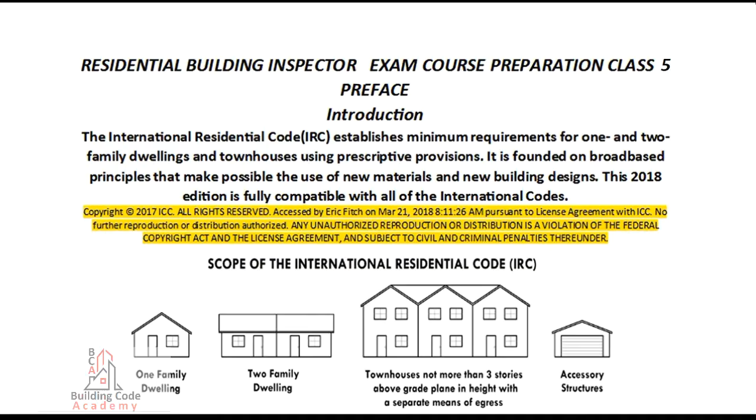R703.1 General. Exterior walls shall provide the building with a weather-resistant exterior wall envelope. The exterior wall envelope shall include flashing as described in section R703.4.

R703.2 Water-resistive barrier. One layer of number 15 asphalt felt, free from holes and breaks, complying with ASTM D226 for Type 1 felt, or other approved water-resistive barrier shall be applied over studs or sheathing of all exterior walls. Number 15 asphalt felt shall be applied horizontally, with the upper layer lapped over the lower layer not less than 2 inches (51 millimeters). Where joints occur, felt shall be lapped not less than 6 inches (152 millimeters). Other approved materials shall be installed in accordance with the water-resistive barrier manufacturer's installation instructions.

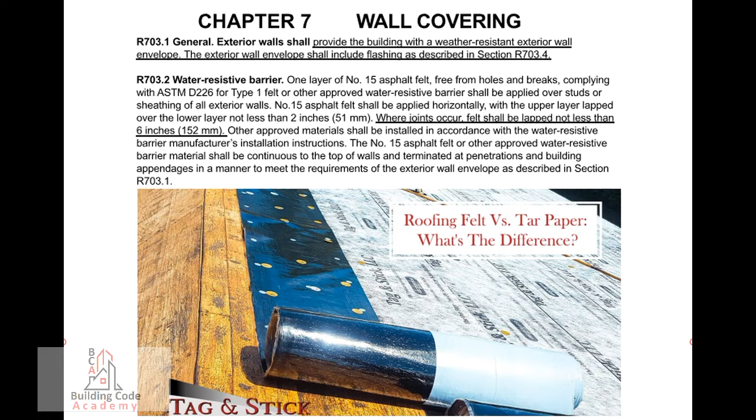The number 15 asphalt felt or other approved water-resistive barrier material shall be continuous to the top walls and terminated at penetrations and building appendages in a manner to meet the requirements of the exterior wall envelope as described in section R703.1.

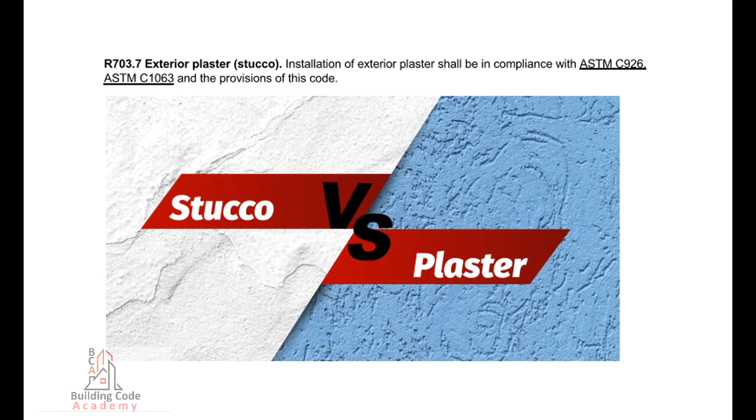R703.7 Exterior plaster, stucco. Installation of exterior plaster shall be in compliance with ASTM C926, ASTM C1063, and the provisions of this code.

R703.7.1 Lath. Lath and lath attachments shall be of corrosion-resistant materials. Expanded metal or woven wire lath shall be attached with 1.5 inch long (38 mm), 11 gauge nails having a 7/16 inch (11.1 mm) head, or 7/8 inch long (22.2 mm), 16 gauge staples, spaced not more than 6 inches (152 millimeters), or as otherwise approved.

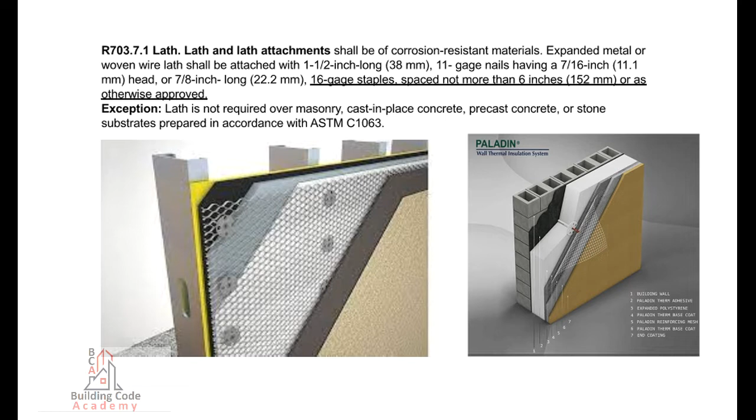Exception: Lath is not required over masonry, cast-in-place concrete, precast concrete, or stone substrates in accordance with ASTM C1063.

R703.9.1 Exterior Insulation and Finish Systems (EIFS). EIFS shall comply with the following: 1. ASTM E2568. 2. EIFS shall be limited to applications over substrates of concrete or masonry wall assemblies. 3. Flashing of EIFS shall be provided in accordance with the requirements of section R703.4. 4. EIFS shall be installed in accordance with the manufacturer's instructions.

5. EIFS shall terminate not less than 6 inches (152 millimeters) above the finished ground level. 6. Decorative trim shall not be face nailed through EIFS.

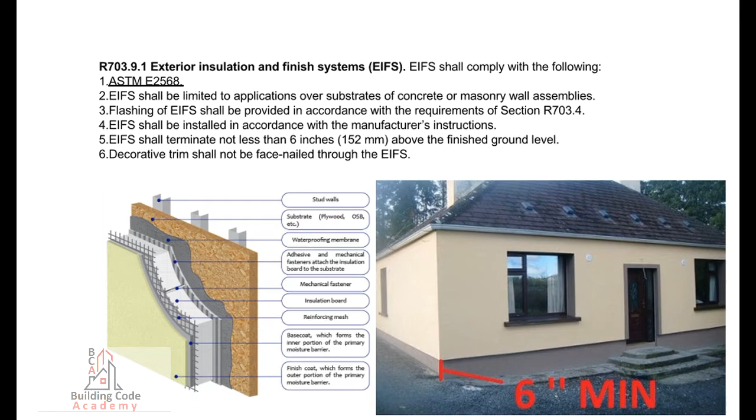R702.3.5.1 Screw fastening. Screws for attaching gypsum board and gypsum panel products to wood framing shall be type W or type S in accordance with ASTM C1002 and shall penetrate the wood not less than 5/8 inch (15.9 millimeters).

Gypsum board and gypsum panel products shall be attached to cold-formed steel framing with minimum number 6 screws. Screws for attaching gypsum board and gypsum panel products to cold-formed steel framing less than 0.033 inch (1 millimeter) thick shall be type S in accordance with ASTM C1002 or bugle head style in accordance with ASTM C1513, and shall penetrate the steel not less than 3/8 inch (9.5 millimeters).

Screws for attaching gypsum board and gypsum panel products to cold-formed steel framing 0.033 inch to 0.112 inch (1 millimeter to 3 millimeters) thick shall be in accordance with ASTM C954 or bugle head style in accordance with ASTM C1513.

Screws for attaching gypsum board and gypsum panel products to structural insulated panels shall penetrate the wood structural panel facing not less than 7/16 inch (11.1 millimeters).

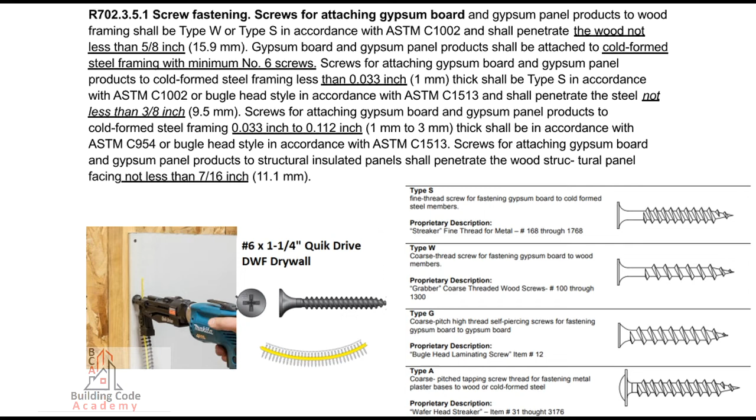Chapter 8, Roof Ceiling Construction. Wood Roof Framing.

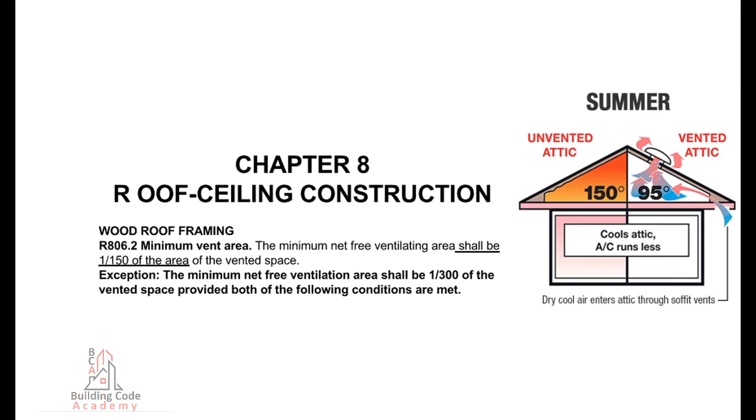R806.2 Minimum Vent Area. The minimum net-free ventilating area shall be 1/150th of the area of the vented space. Exception: the minimum net-free ventilation area shall be 1/300th of the vented space provided both of the following conditions are met.

R802.3 Ridge. A ridge board used to connect opposing rafters shall be not less than 1 inch (25 millimeters) nominal thickness, and not less in depth than the cut end of the rafter. Where ceiling joist or rafter ties do not provide continuous ties across the structure, a ridge beam shall be provided and supported on each end by a wall or girder.

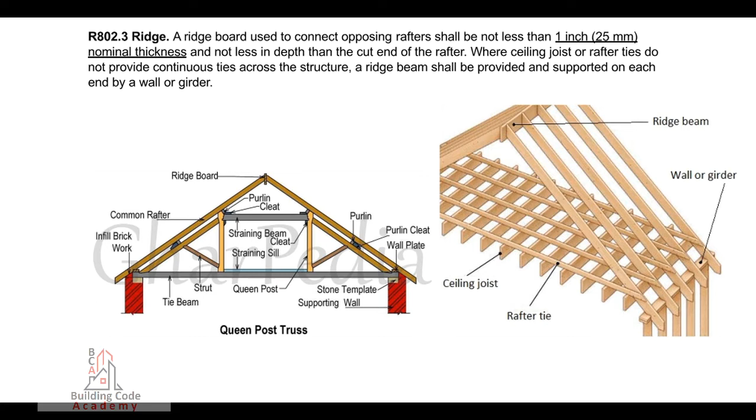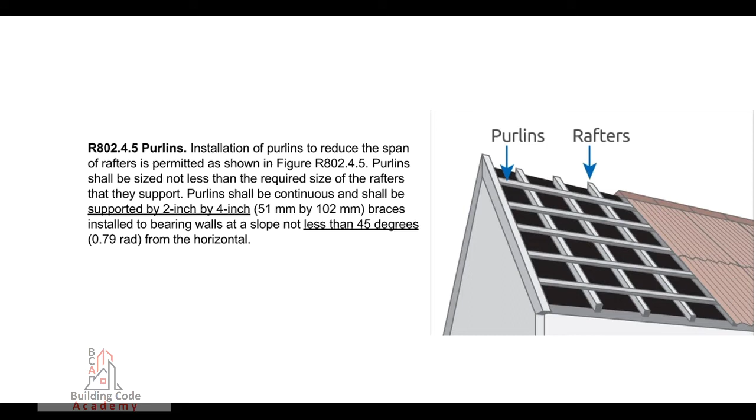R802.4.5 Purlins. Installation of purlins to reduce the span of rafters is permitted as shown in Figure R802.4.5. Purlins shall be sized not less than the required size of the rafters that they support. Purlins shall be continuous and shall be supported by 2 inch by 4 inch (51 mm by 102 mm) braces installed into bearing walls at a slope not less than 45 degrees (0.79 radians) from the horizontal.

R802.5.2.1 Ceiling Joists Lapped. Ends of ceiling joists shall be lapped not less than 3 inches (76 millimeters), or butted over bearing partitions or beams and toe-nailed to the bearing member. Where ceiling joists are used to provide resistance to rafter thrust, lapped joists shall be nailed together in accordance with Table R802.5.2, and butted joists shall be tied together in a manner to resist such thrust.

Joists that do not resist thrust shall be permitted to be nailed in accordance with Table R602.3.1. Wood structural panel roof sheathing in accordance with Table...

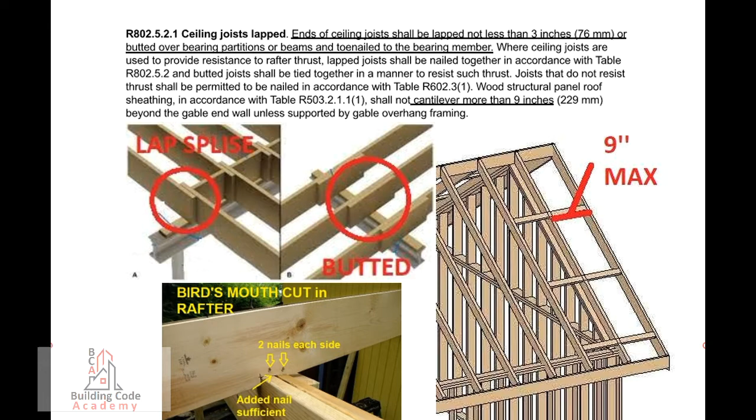R503.2.1.1(1) shall not cantilever more than 9 inches (229 millimeters) beyond the gable end wall, unless supported by gable overhang framing.

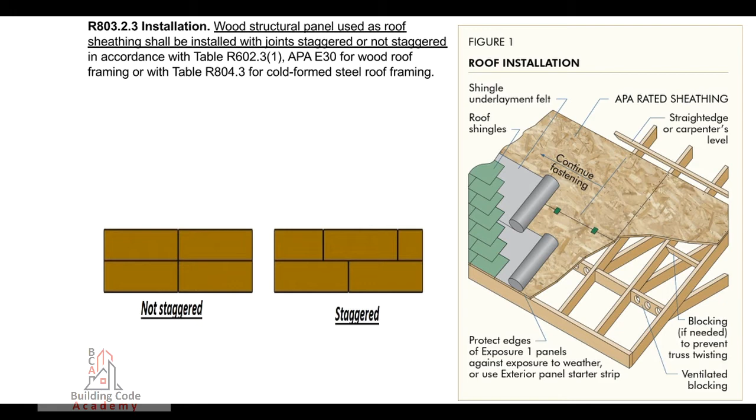R803.2.3 Installation. Wood structural panel used as roof sheathing shall be installed with joints staggered or not staggered in accordance with Table R602.3.1, APA E30 for wood roof framing, or with Table R804.3 for cold-formed steel roof framing.

807.1 Attic Access. Buildings with combustible ceiling or roof construction shall have an attic access opening to attic areas that have a vertical height of 30 inches (762 millimeters) or greater over an area of not less than 30 square feet (2.8 meters squared). The vertical height shall be measured from the top of the ceiling framing members to the underside of the roof framing members.

The rough framed opening shall be not less than 22 inches by 30 inches (559 millimeters by 762 millimeters), and shall be located in a hallway or other location with ready access. Where located in a wall, the opening shall be not less than 22 inches wide by 30 inches high (559 millimeters wide by 762 millimeters high).

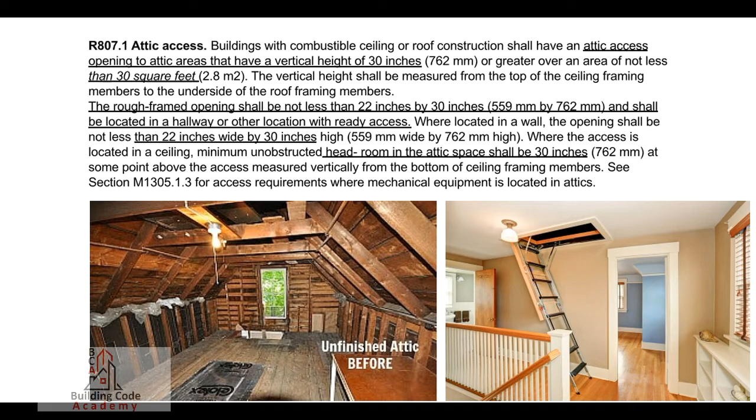Where the access is located in a ceiling, minimum unobstructed headroom in the attic space shall be 30 inches (762 millimeters), at some point above the access measured vertically from the bottom of the ceiling framing members. See Section M1305.1.3 for access requirements where mechanical equipment is located in attics.

Chapter 9. Roof Assemblies.

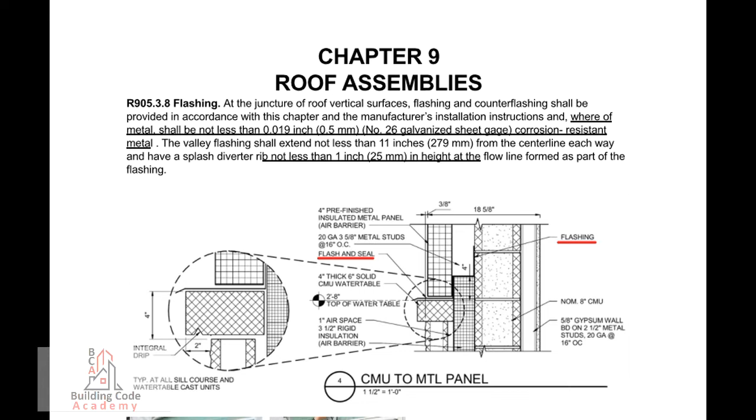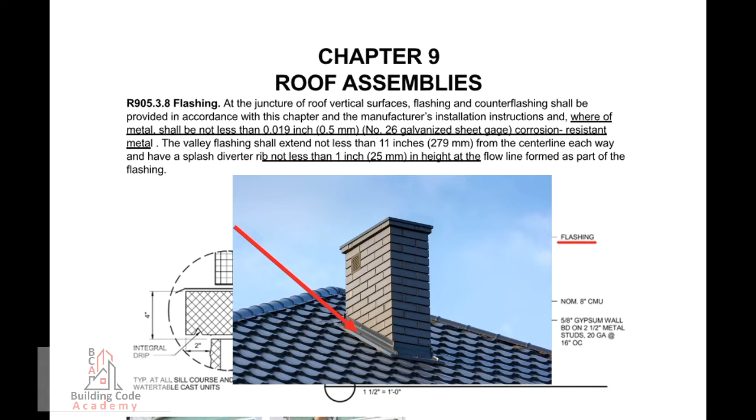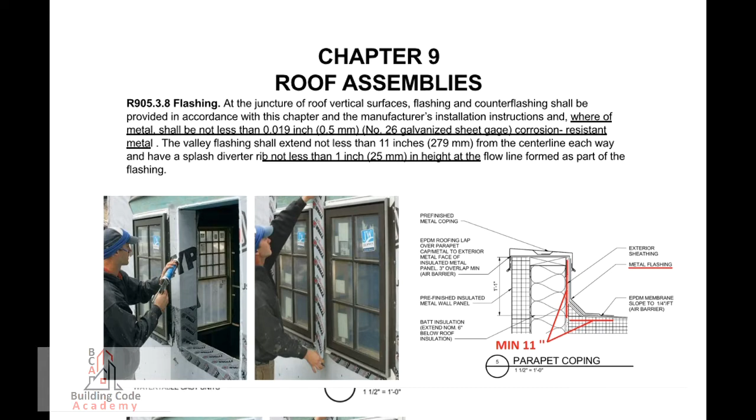R905.3.8 Flashing. At the juncture of roof vertical surfaces, flashing and counterflashing shall be provided in accordance with this chapter and the manufacturer's installation instructions, and where of metal shall be not less than 0.019 inch (0.5 millimeters), number 26 galvanized sheet gauge, corrosion-resistant metal. The valley flashing shall extend not less than 11 inches (279 millimeters) from the center line each way, and have a splash diverter rib not less than 1 inch (25 millimeters) in height, at the flow line formed as part of the flashing.

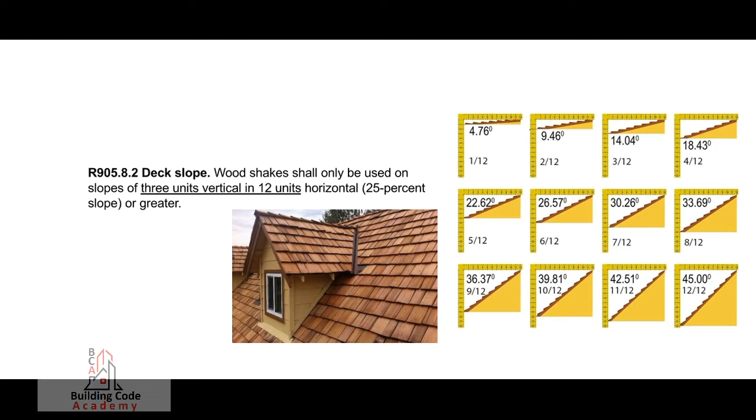R905.8.2 Deck slope. Wood shakes shall only be used on slopes of 3 units vertical in 12 units horizontal, 25% slope or greater.

R902.1 Roofing covering materials. Roofs shall be covered with materials as set forth in sections R904 and R905. Class A, B, or C roofing shall be installed in jurisdictions designated by law as requiring their use, or where the edge of the roof is less than 3 feet (914 millimeters) from a lot line. Class A, B, and C roofing required by this section to be listed shall be tested in accordance with UL 790 or ASTM E108.

Exceptions. 1. Class A roof assemblies include those with coverings of brick, masonry, and exposed concrete roof deck. 2. Class A roof assemblies include ferrous or copper shingles or sheets, metal sheets and shingles, clay or concrete roof tile, or slate installed on non-combustible decks. 3. Class A roof assemblies include minimum 16 ounces per square foot of copper sheets installed over combustible decks. 4. Class A roof assemblies include slate installed over underlayment over combustible decks.

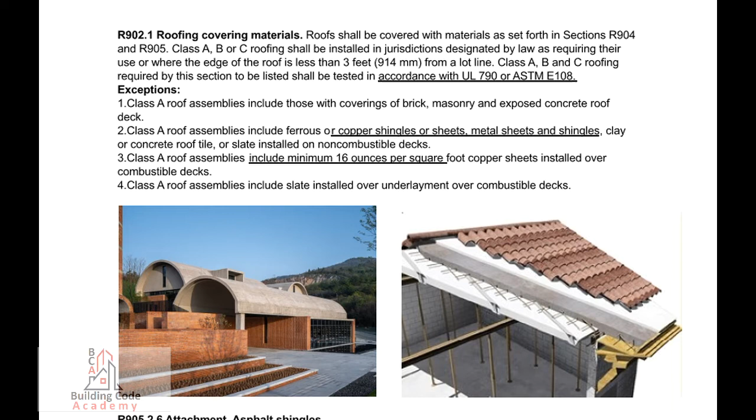R905.2.6 Attachment. Asphalt shingles shall have the minimum number of fasteners required by the manufacturer's approved installation instructions, but not less than 4 fasteners per strip shingle or 2 fasteners per individual shingles. Where the roof slope exceeds 21 units vertical and 12 units horizontal (175% slope), shingles shall be installed in accordance with the manufacturer's approved installation instructions.

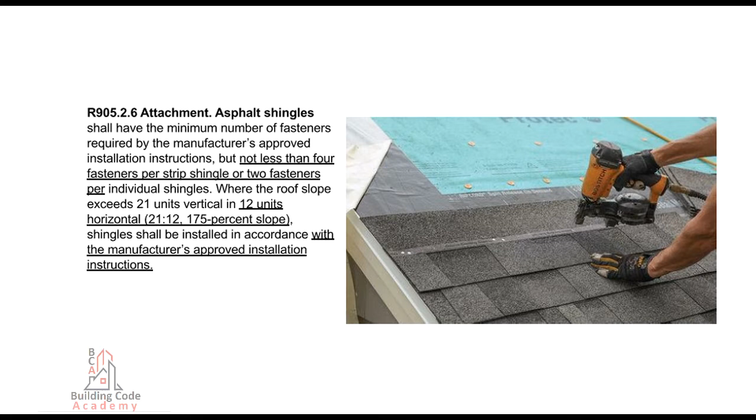Chapter 10. Chimneys and Fireplaces. Masonry fireplaces.

R1001.2 Footings and Foundations. Footings for masonry fireplaces and their chimneys shall be constructed of concrete or solid masonry, not less than 12 inches (305 millimeters) thick, and shall extend not less than 6 inches (152 millimeters) beyond the face of the fireplace or foundation wall on all sides. Footings shall be founded on natural undisturbed earth or engineered fill below frost depth. In areas not subjected to freezing, footings shall not be less than 12 inches (305 millimeters) below finished grade.

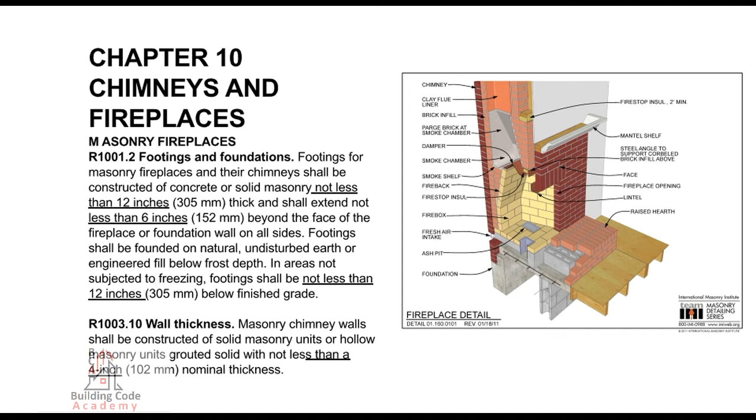R1003.10 Wall thickness. Masonry chimney walls shall be constructed of solid masonry units or hollow masonry units grouted solid with not less than a 4-inch (102 millimeter) nominal thickness.

R1003.19 Chimney fire blocking. Spaces between chimneys and floors and ceilings through which chimneys pass shall be fire blocked with non-combustible material securely fastened in place. The fire blocking of spaces between chimneys and wood joists, beams, or headers shall be self-supporting or be placed on strips of metal or metal lath laid across the spaces between combustible material and the chimney.

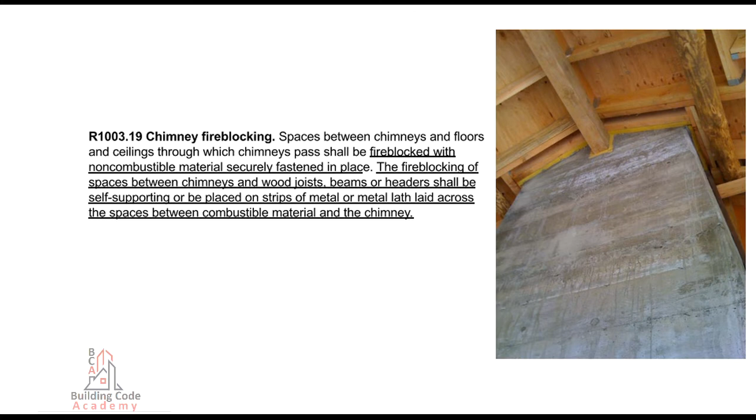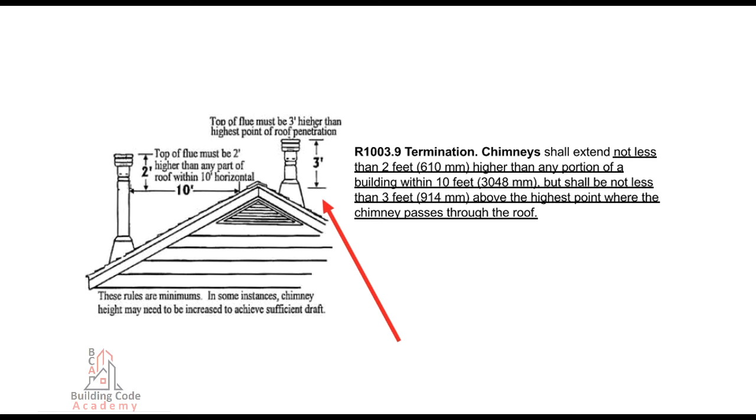R1003.9 Termination. Chimneys shall extend not less than 2 feet (610 millimeters) higher than any portion of a building within 10 feet (3,048 millimeters), but shall be not less than 3 feet (914 millimeters) above the highest point where the chimney passes through the roof.

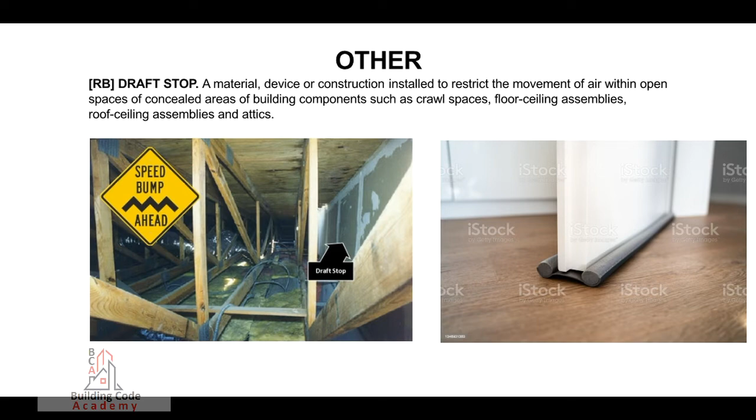Other, RB. Draft stop: a material, device, or construction installed to restrict the movement of air within open spaces of concealed areas of building components, such as crawl spaces, floor-ceiling assemblies, roof-ceiling assemblies, and attics.

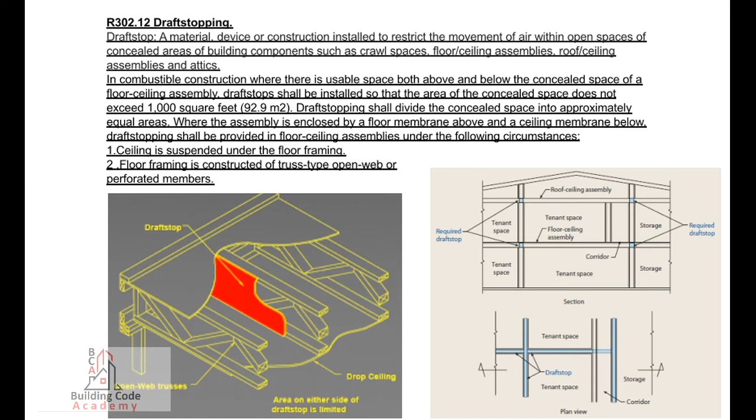R302.12 Draft Stopping. Draft stop: a material, device, or construction installed to restrict the movement of air within open spaces of concealed areas of building components such as crawl spaces, floor-ceiling assemblies, roof-ceiling assemblies, and attics. In combustible construction where there is usable space both above and below the concealed space of a floor-ceiling assembly, draft stops shall be installed so that the area of the concealed space does not exceed 1,000 square feet (92.9 meters squared). Draft stopping shall divide the concealed space into approximately equal areas. Where the assembly is enclosed by a floor membrane above and a ceiling membrane below, draft stopping shall be provided in floor-ceiling assemblies under the following circumstances: 1. Ceiling is suspended under the floor framing. 2. Floor framing is constructed of truss-type, open web, or perforated members.

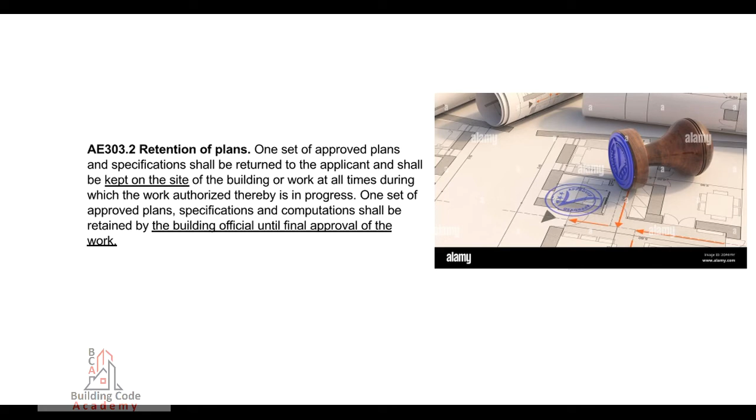AE 303.2 Retention of Plans. One set of approved plans and specifications shall be returned to the applicant and shall be kept on the site of the building or work at all times during which the work authorized thereby is in progress. One set of approved plans, specifications, and computations shall be retained by the building official until final approval of the work.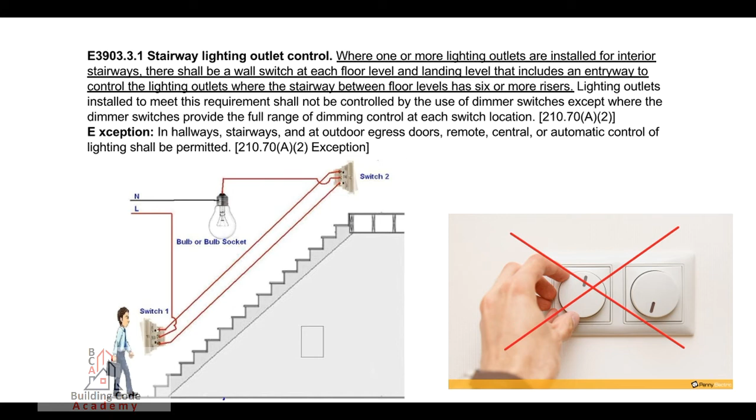210.70(A)(2) Exception: In hallways, stairways, and at outdoor egress doors, remote, central, or automatic control of lighting shall be permitted.

AJ601.1.3 Guards. Every open portion of a stair, landing, or balcony that is more than 30 inches (762 millimeters) above the floor or grade below, is part of the egress path for any work area, and does not have guards, or in which the existing guards are judged to be in danger of collapsing, shall be provided with guards designed and installed in accordance with Section R312.

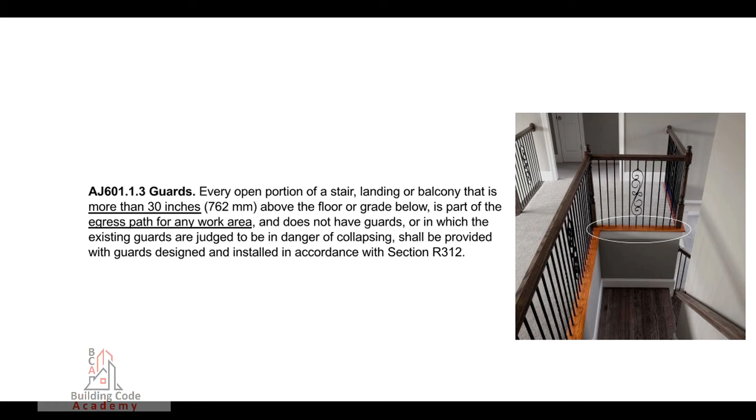RB. Skylights and sloped glazing. Glass or other transparent or translucent glazing material installed at a slope of 15 degrees (0.26 radians) or more from vertical. Unit skylights, tubular daylighting devices, and glazing materials in solariums, sunrooms, roofs, and sloped walls are included in this definition. For the definition applicable in Chapter 11, see Section N1101.6.

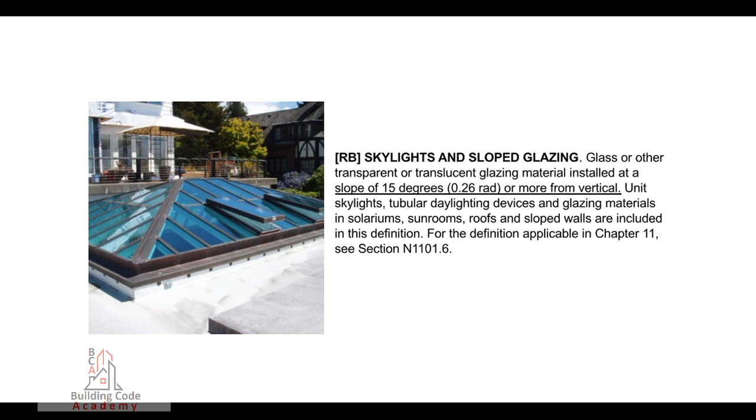AE 302.2 Plans and Specifications. Plans, engineering calculations, diagrams, and other data as required by the building official shall be submitted in not less than 2 sets with each application for a permit. The building official has the authority to require plans, computations, and specifications to be prepared and designed by an engineer or architect licensed by the state to practice as such. Where unusual site conditions do not exist, the building official has the authority to accept approved standard foundation plans and details in conjunction with the manufacturer's approved installation instructions, without requiring the submittal of engineering calculations.

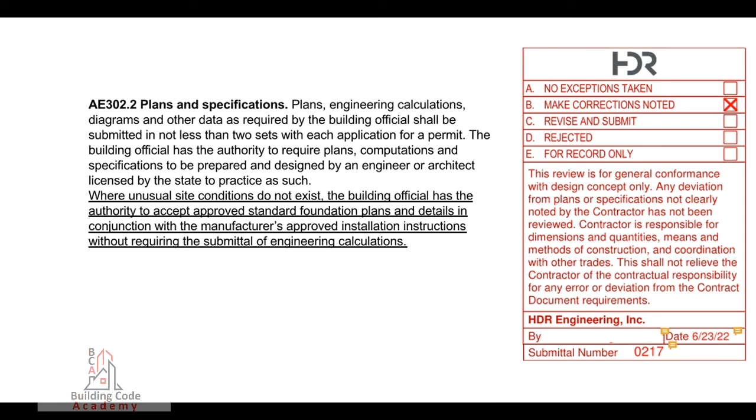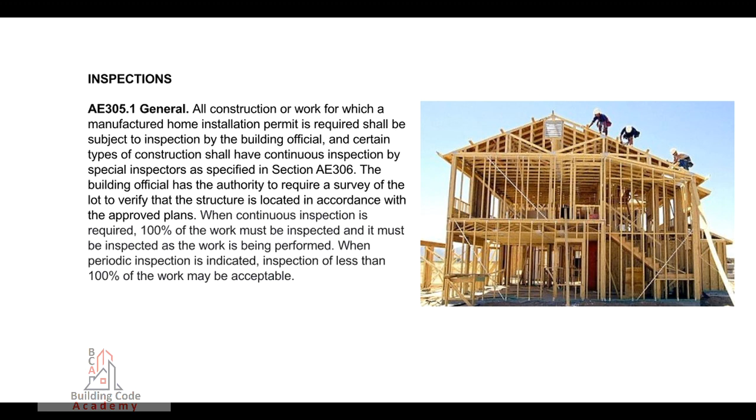Inspections. AE 305.1 General. All construction or work for which a manufactured home installation permit is required shall be subject to inspection by the building official, and certain types of construction shall have continuous inspection by special inspectors as specified in Section AE 306. The building official has the authority to require a survey of the lot to verify that the structure is located in accordance with the approved plans. When continuous inspection is required, 100% of the work must be inspected, and it must be inspected as the work is being performed. When periodic inspection is indicated, inspection of less than 100% of the work may be acceptable.